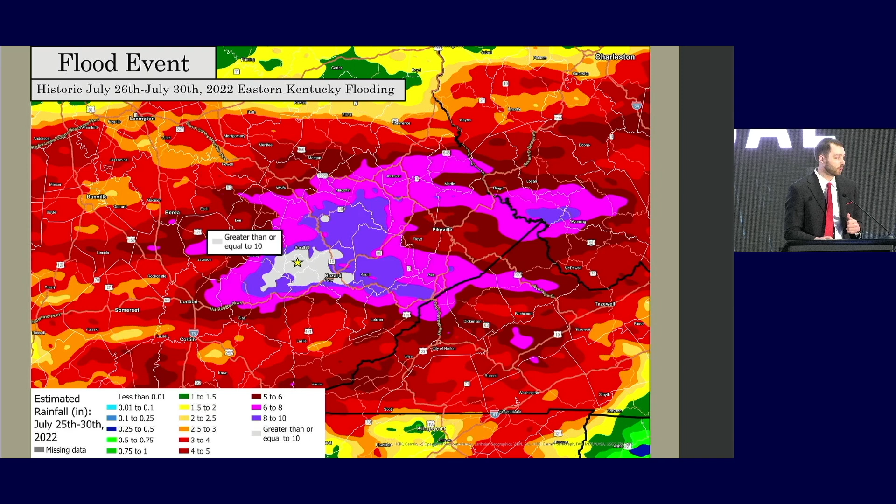So when we got all of this rainfall, Squabble Creek actually ended up flowing over that peninsula and crashing straight into the western bank of the campground.

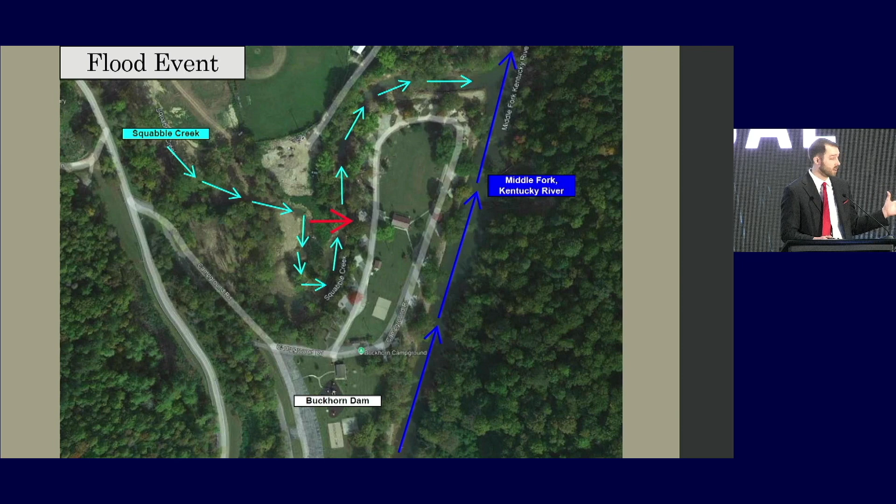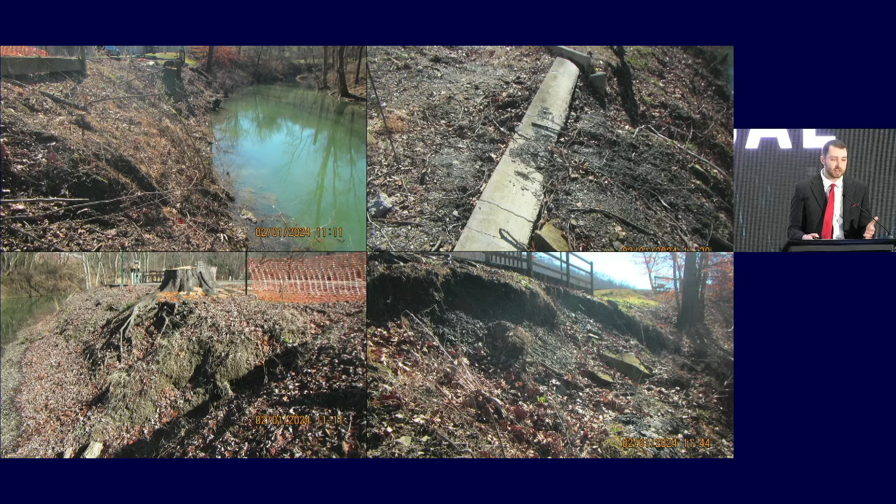In the top right photo, you can see that some of the gravel camper pads had small retaining walls that entirely failed. So these camper pads are no longer in use, and they've been roped off for a little while now, since 2022.

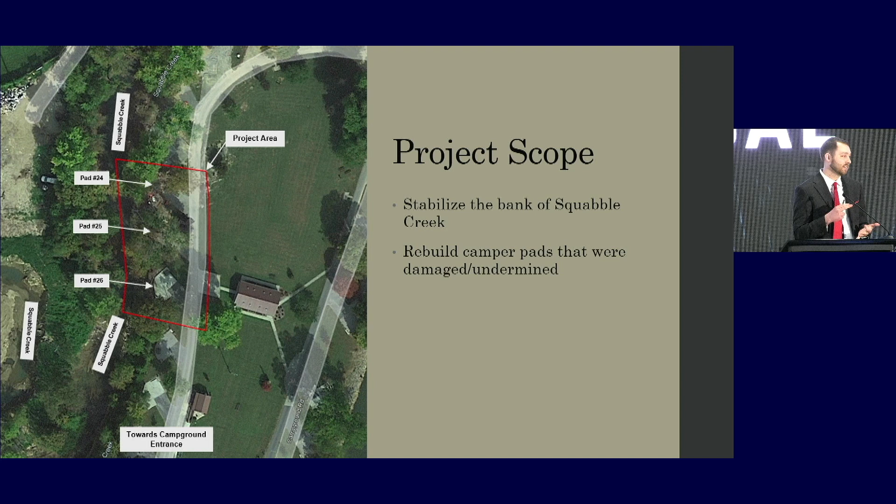So our job was to come in and provide a stabilized bank design and also restore this campground back to working order, which involved some reconcreting of the camper pads, some paving work, grading, and other things like that to bring everything back into working order.

So to start out with these priorities, we have some constraints on this project. The customer really wants to regain all of the camper pad space that they lost and regain as much ground as possible. Our customer in this scenario is Buckhorn Lake staff.

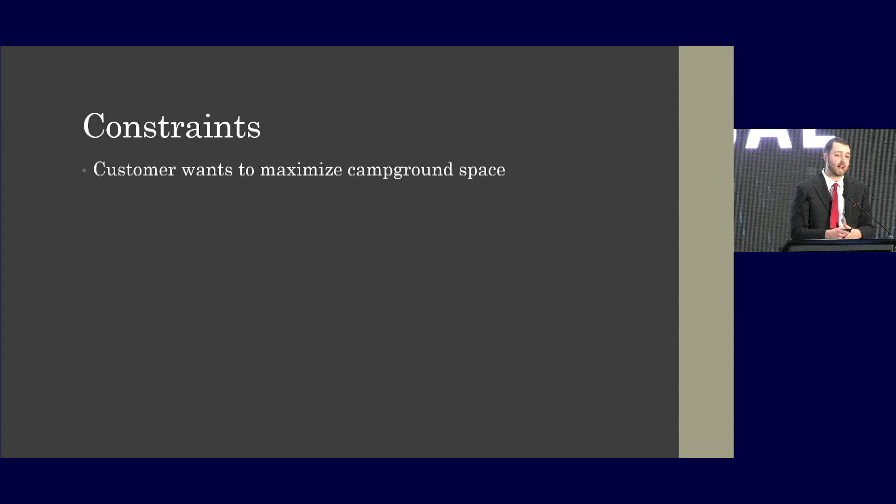They are district employees for the Louisville district, so we're all on the same team here. But it is important that we serve them as the customer, so they want to regain all of the ground that they lost.

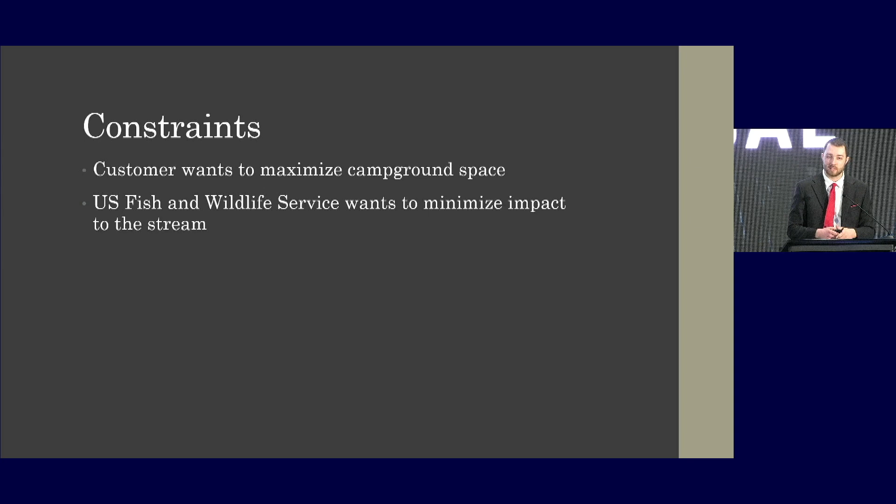We do have an endangered fish in Squabble Creek, so there's another constraint. The Kentucky arrow darter makes its home in Squabble Creek, so the U.S. Fish and Wildlife Service will have a hand in our design, and they have to sign off on everything we're doing to make sure we're minimizing impact into that critical habitat.

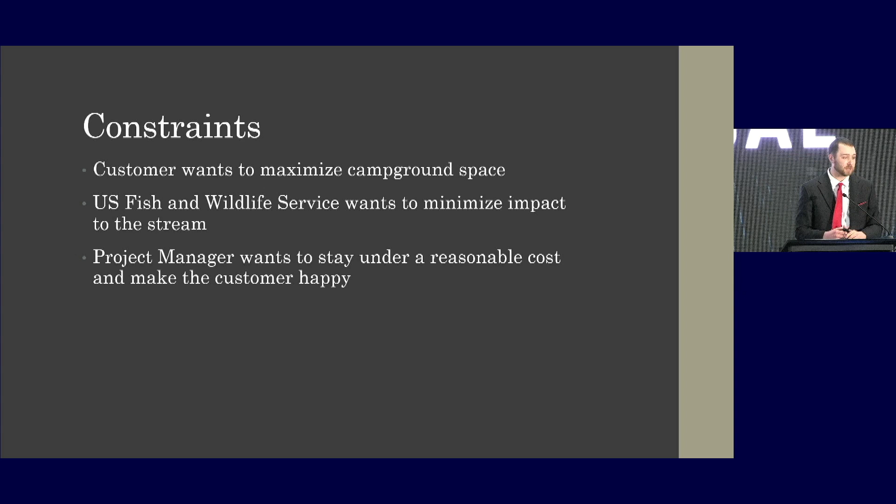The project manager, of course, wants to provide a design that is under a reasonable cost, and we are working with emergency funds for this one. So we really do not have a lot of funds to play around with, and we don't have a lot of wiggle room. That is something that will come up later, and we'll talk about that.

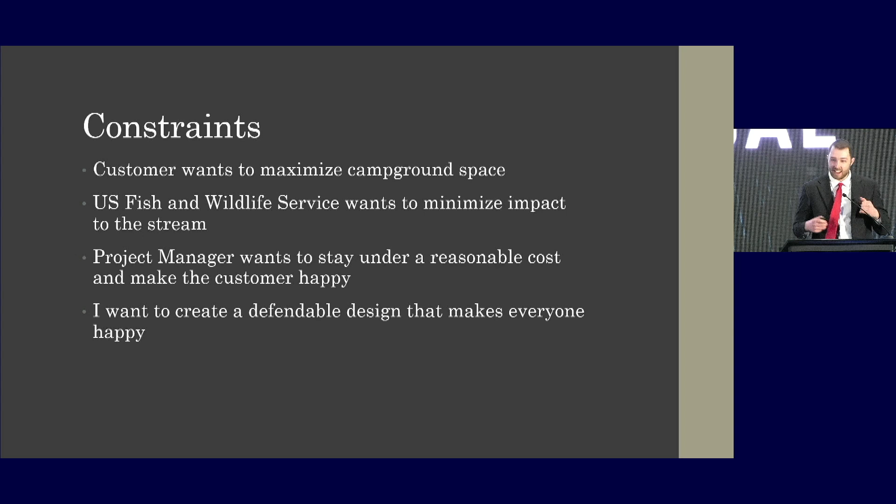And I, of course, want to create a design that makes everyone happy, that checks all the boxes, and everyone is just a happy camper, pun intended.

So to get started with this one, we are thinking of a vertical solution. A vertical solution for this one will allow us to regain all of that camper pad ground that we lost and also stay out of the stream and minimize impact to the critical habitat.

A sheet pile wall was really the first one that we talked about, and that was thrown out early because we are expecting shallow rock out there, which we confirmed in our geotechnical investigation. So we couldn't really drive sheet piles without doing some type of tiebacks or something like that, which we definitely did not have enough money for. So we threw that out pretty early on.

So then we moved into a natural stone wall. Really, when we were looking at the slope, we had about 15 to 20 feet in height that we had to stabilize. So procuring these materials and these large stones was going to be very costly and was not going to be feasible for this one. So we moved on from that also.

And we landed on a Redi-Rock gravity retaining wall. We were getting some quotes from Redi-Rock, and we did feel like we could move forward with this one. I was really happy that I got to speak with some design engineers that do design for retaining walls and things like that. So I was very happy with that direction, but that's where we got started.

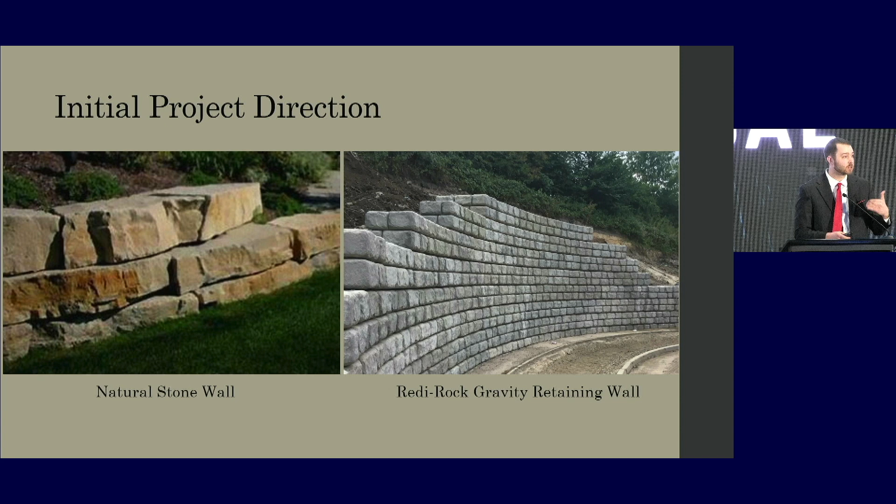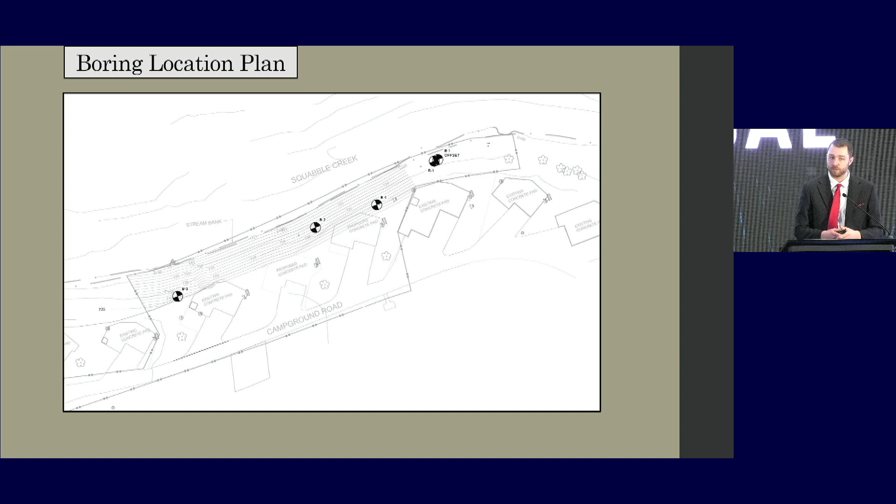So to get into our geotechnical investigation here, we see our boring location plan. We started out with 3 borings, and we did hit that shallow rock at about 20 feet below ground surface. So we got to add another boring because we had some leftover footages in the contract. So we added boring number 4 between boring 1 and 2.

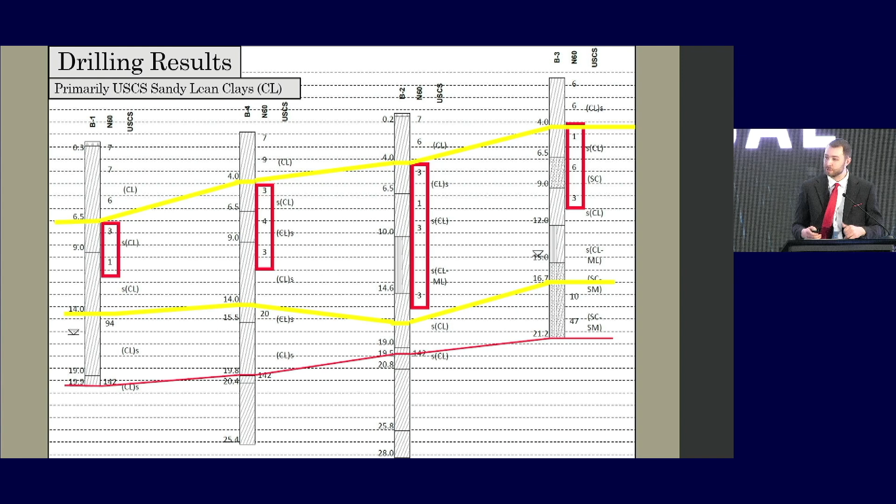On our drilling results, we primarily had USCS sandy lean clays throughout. And I'm sure some of you in the first couple rows are starting to read these are corrected blow counts that I have highlighted.

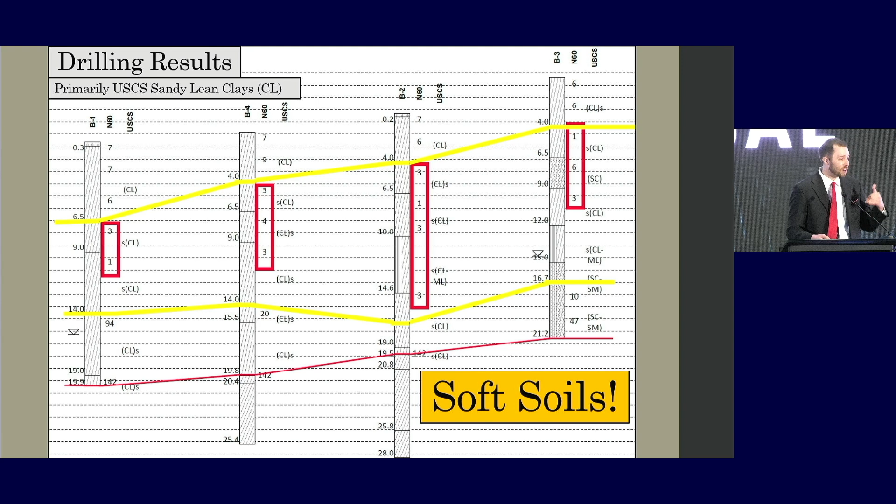If you can't see them, they are very low, and we have soft soils on the site. So that just added a constraint, another thing I have to think about in my design. As I'm thinking about this and talking to Redi-Rock, I'm thinking, man, we're really going to need some sort of ground modification or foundation below this Redi-Rock wall.

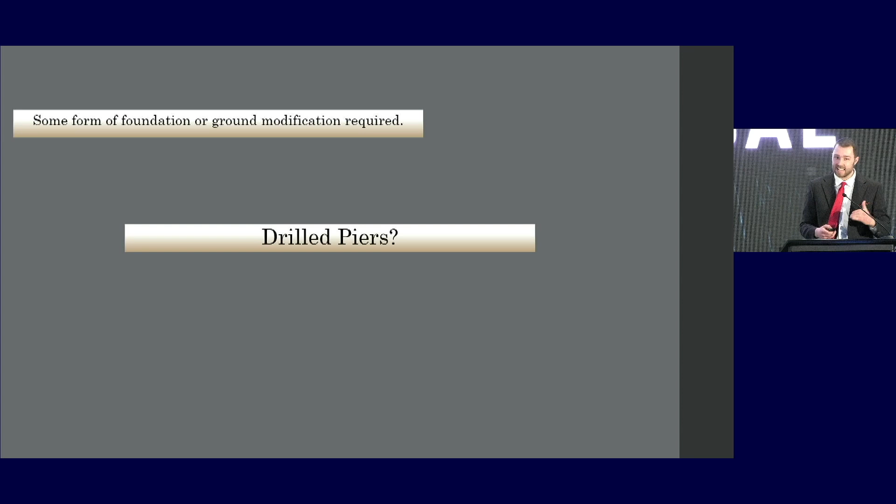I'm talking to Redi-Rock, and now drilled piers are kind of what's being recommended to take it down to rock underneath the wall. And how much is this going to cost? It became very apparent quickly that we were not going to have a project if we had to do drilled piers and take this down to rock.

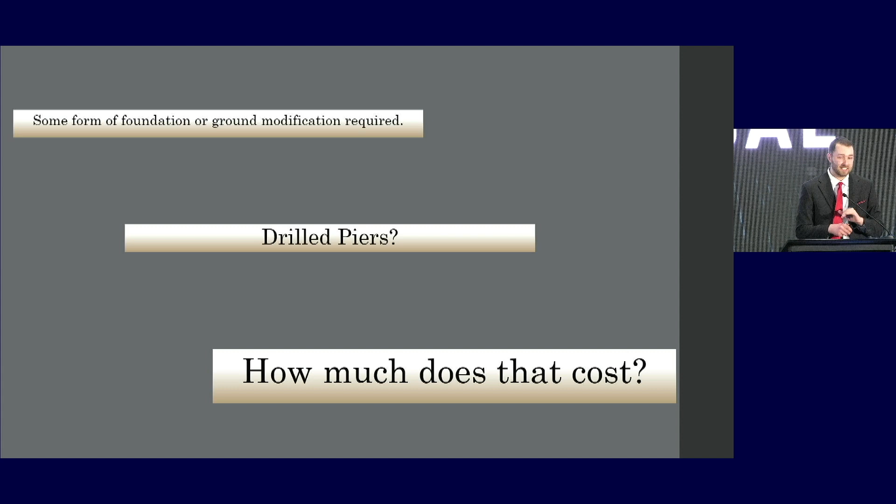We're working with emergency funds. We barely had enough to do the Redi-Rock wall to start. So now that we have soft soils, we have to get back to the drawing board and think of something else.

Of course, coming from geotech, our recommendation for a cheap solution for bank stabilization is to lay the slope back and put riprap down. So we switched lanes into that. That is what we ended up rolling with, doing a riprap slope.

So we go into doing some slope stability modeling, and I started out with the steepest and thinnest riprap section we could possibly get, to save as much ground as we can, because now we're moving from a vertical solution that gains back a lot of campground space to a laid back slope, so we're losing some campground space.

So I started out with a 1.5 to 1 slope with a 2-foot riprap section. I did not get the factors of safety, especially in rapid drawdown, that I needed to make it a defendable design. We moved over to doing a 4-foot riprap section. That also did not really change anything.

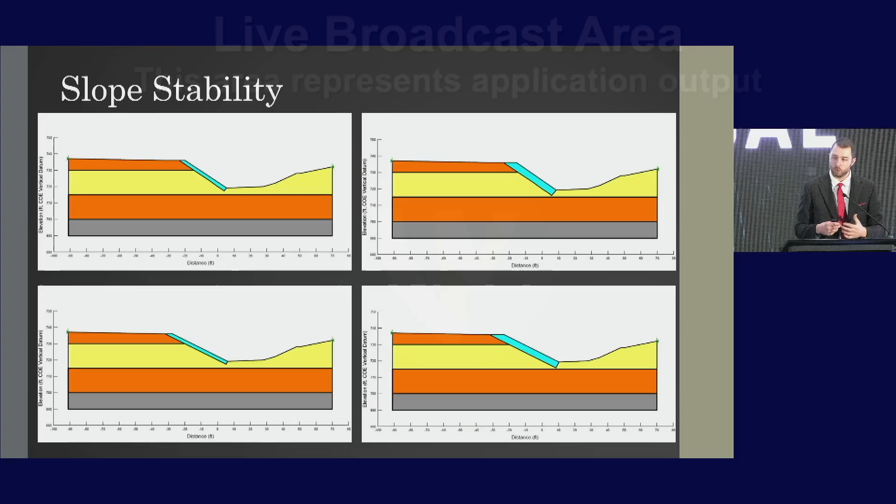So we ended up with a 2-to-1 slope with a 2-foot riprap section. And of course we got some pushback for that, because the customer is now going to receive a 2-to-1 slope from a vertical solution that we started out with. They were not very happy with that, and reasonably so.

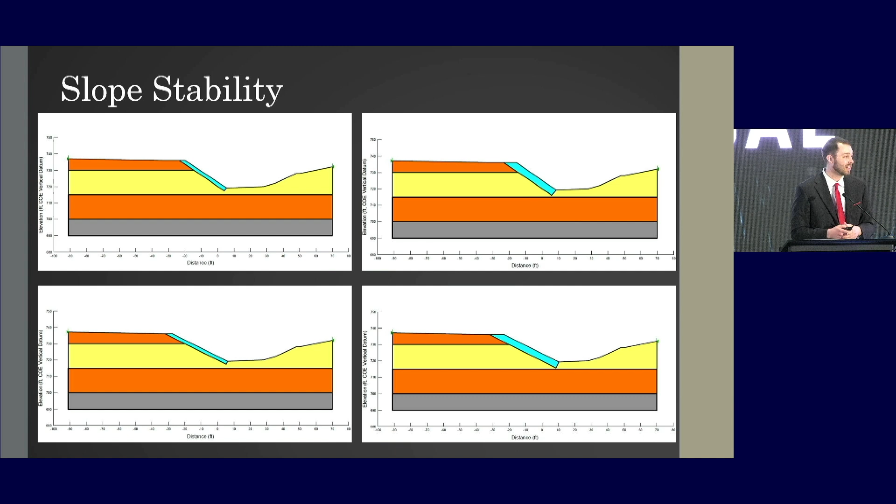But I think this is a really good time for me to think about what my priorities are. My top priority is to create a defendable bank stabilization design, one that is safe and will protect all the people camping right on top of this slope.

I know the customer wants to provide the best campground experience to their customers, and I'm sure a vertical solution would be awesome and would look great, with a viewing area of the water and all that kind of stuff. But when it came down to it, my contribution was a safe, stabilized bank design.

All right, so the bottom line for this one, it really did come down to money, but I had to come to the table with something that I felt good about that would allow us to do all the restoration we needed for the site while having a stabilized bank design.

So with this one, we not only de-scoped from doing a vertical solution, a Redi-Rock wall, down to a riprapped, laid back slope, but we also went from 4 camper pads to restore down to 3. We really did not have a lot of money on this one, and that is something I learned from this, to speak up about early.

But my lessons learned for this one is to have your top priorities established. And really for geotechnical professionals, safety is paramount, especially in these bank stabilization designs where the public is going to be impacted by our work.